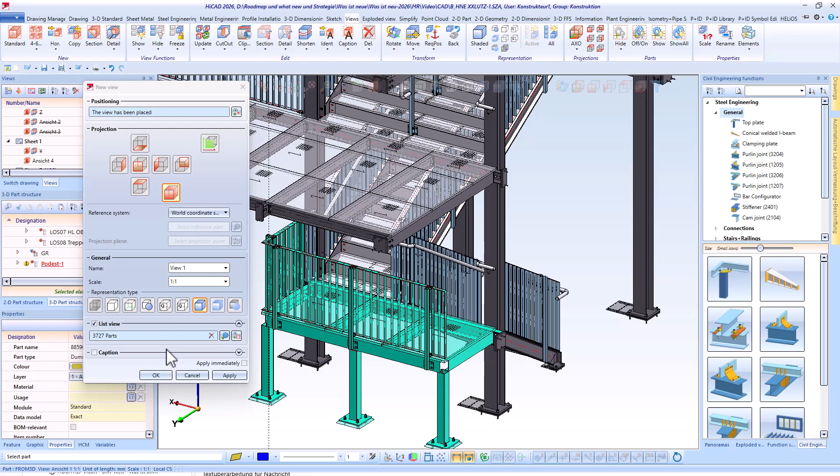In this video, I will show you the new features in steel engineering in HiCAD 2026. The new HiCAD version includes the new steel engineering connection, top plate, in the civil engineering functions docking window. This connection can be used to connect a beam, for example, a column, to two other intersecting beams using a

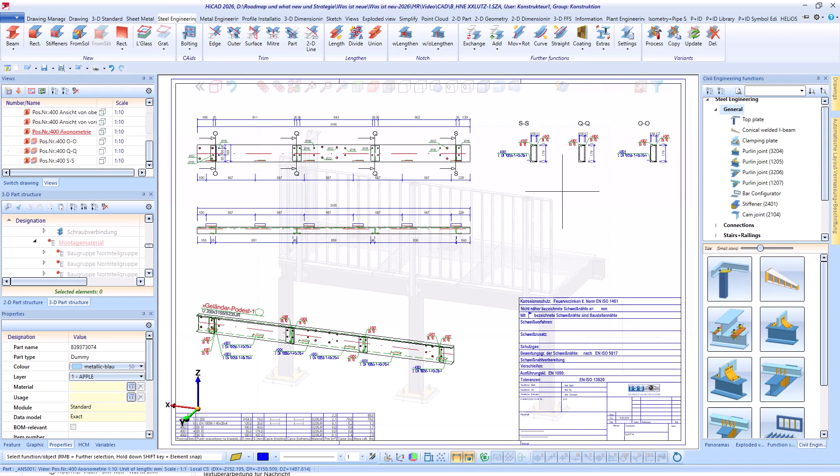top plate. In addition, several enhancements have been implemented in the field of automatic drawing derivation. These relate to the dimensioning of identical attached parts and the annotation of different attached parts. For better comprehensibility of the top plate connection, I will first create a detail view.

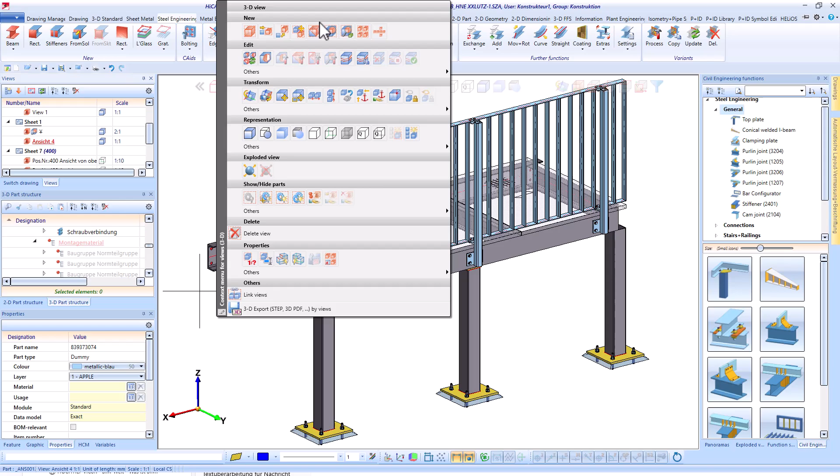In our example, it makes sense to automatically mount the column and the girders of the platform together using a connection. After starting the connection dialog, all three beams are to be selected first. First, a corresponding usage can be specified for the created welded assembly.

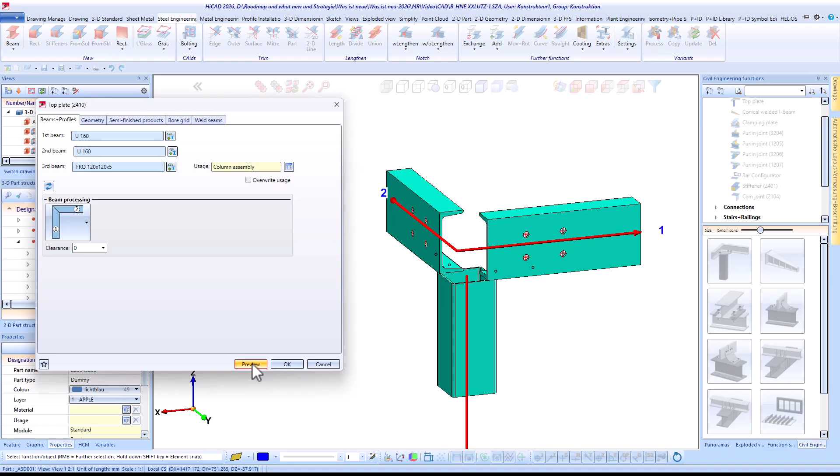The processing of the selected beams can also be defined in the dialog window. Various options are available. In our example, I choose the variant with a miter. The geometry of the plate can be adjusted using the corresponding tab with many parameters. Here, too, the values can be defined individually depending on the geometry type.

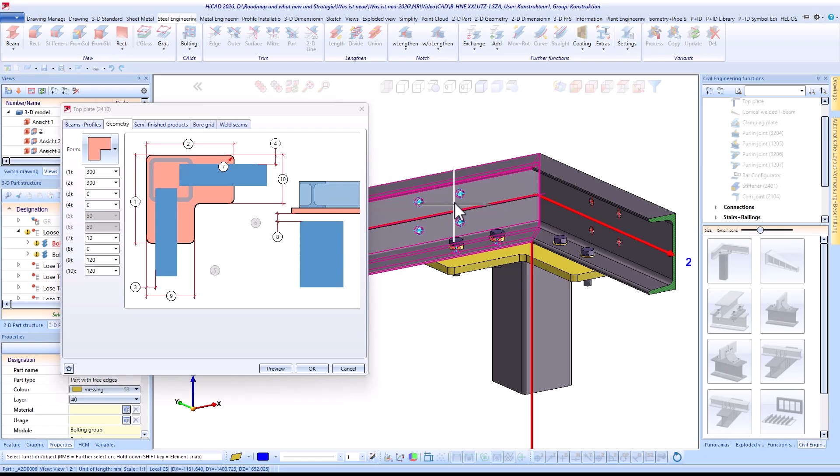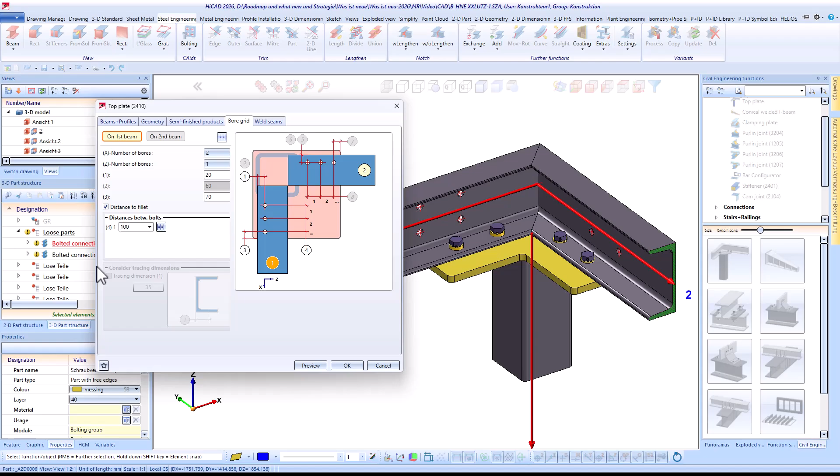The Semi-Finished Products tab also allows both the semi-finished plates and the fasteners to be flexibly selected from the catalogs. The bore grid can be precisely configured for all applications and both beams. In the case of I-beams, the tracing dimensions can also be used to define the bore pattern. And, of course, there is also an option to automatically generate weld seams.

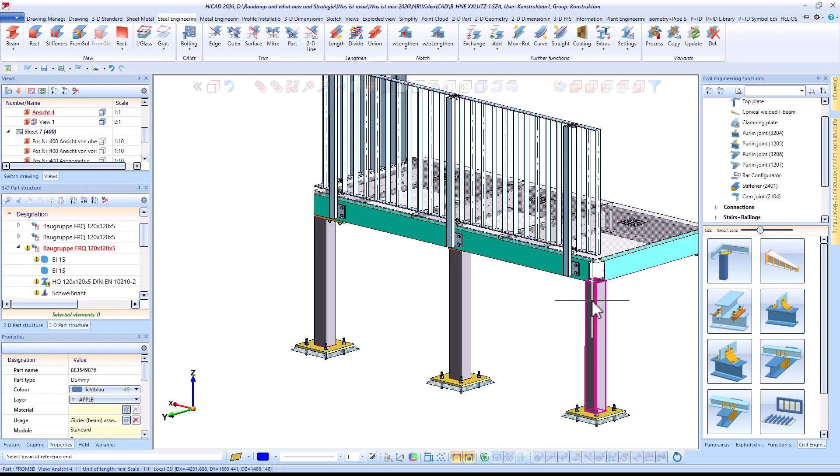A connection created in this way can be duplicated at any time using the integrated copy function. The beams should be selected in the defined order and the connection is generated with all defined parameters and properties. When the connection is created, an assembly is automatically generated in which the column will be the main part. This allows workshop drawings, including dimensioning and annotations, as well as an optional bill of materials for the entire assembly

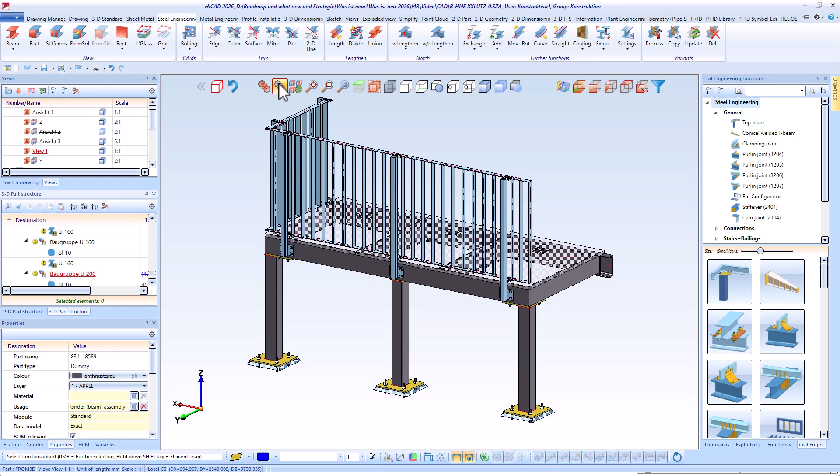to be generated automatically. The new features in drawing derivation relate in particular to the automatic dimensioning of identical attached parts that are also in the same position relative to the main part. In addition, attached parts can now be annotated differently depending on their part type. In our case, I choose the assembly in which both plates and beams are defined as attached parts. First, after automatic itemization, the drawing derivation for the desired assembly is created.

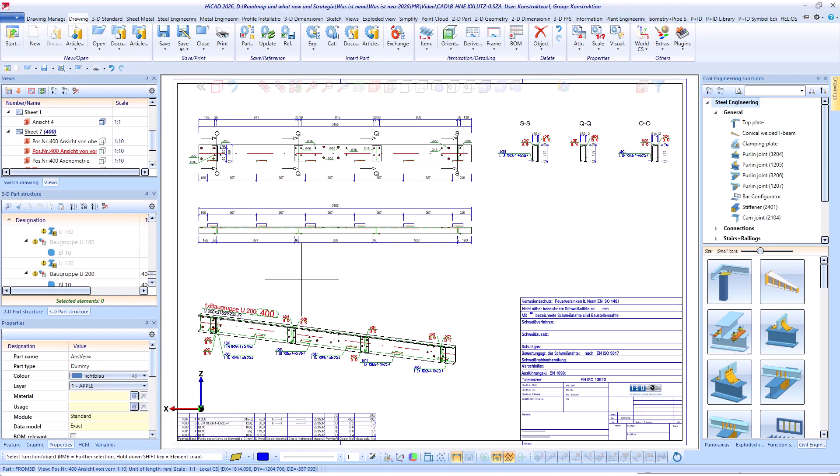In the assembly, the stiffeners and end plates have the same position. Thanks to the new setting, they are only dimensioned once and not, as before, individually for each plate. This setting can be configured as desired. In addition, different annotation settings can be defined for plates and beams, making the representation in the drawings much clearer.

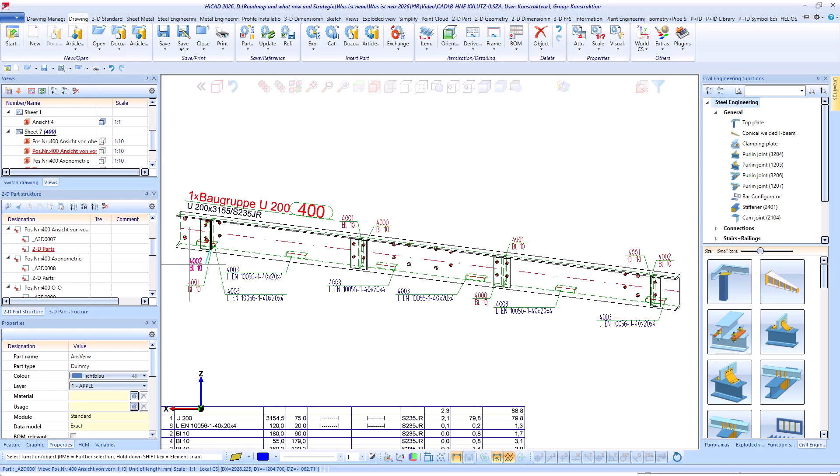This was a brief overview of the new steel engineering connection, top plate, and the enhancements to automatic drawing derivation for steel engineering drawings in HiCAD 2026.